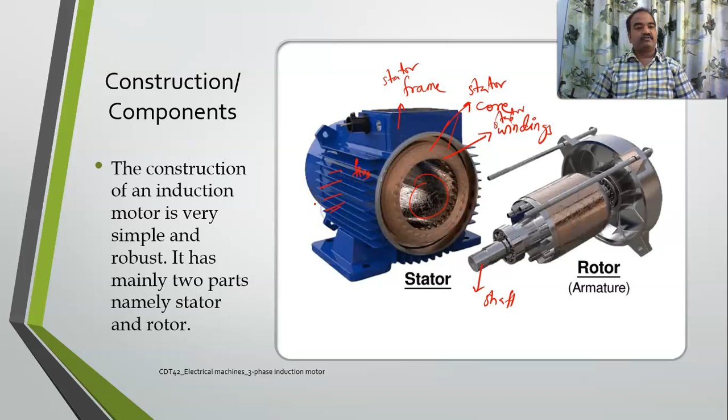I'll show you. These are the fins. These are used for heat dissipation. They provide good air circulation, so that your motor gets cooled. These are called fins.

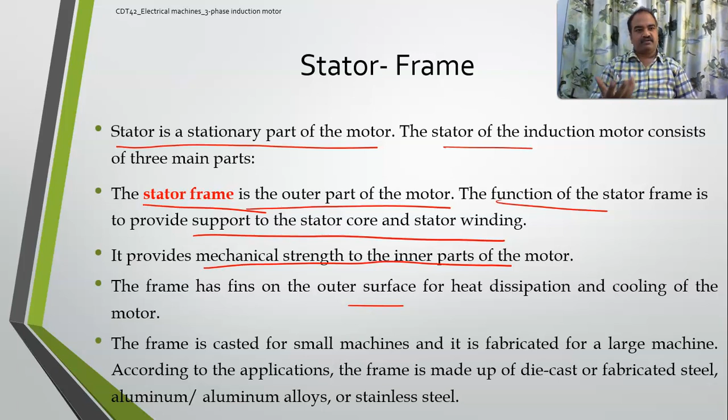For this entire frame, if it is a small machine and you are not looking for larger efficiency, you will use casting, and if it is a very big machine, you will go with fabrication. You will take many pieces and then fabricate the entire frame. Normally it is made of cast iron, and if you want more efficiency, you can go with fabricated steel, or if you want a lightweight one, you can go with aluminum.

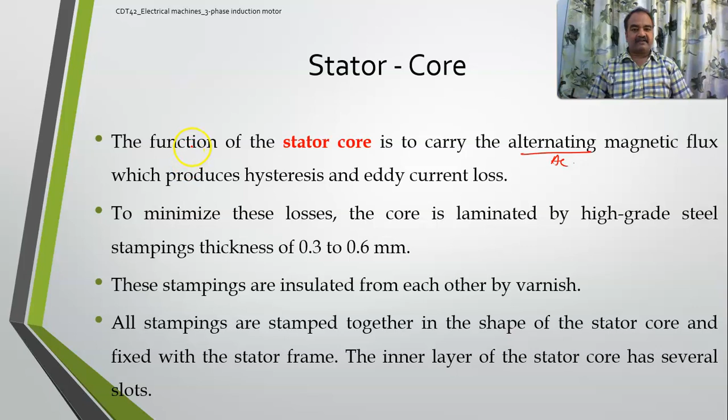Next comes the stator core, which is basically part of your magnetic field development. The core carries the AC magnetic flux. The poles are part of this core, over which your windings will be. Whenever current flows through these windings, you get a magnetic field, and this magnetic field is carried by the core. In this process, it will develop magnetic losses, which we call hysteresis and eddy current losses. To minimize these losses, the entire core will be laminated.

Instead of using one big piece of core, it will be laminated, and between these laminations you provide insulation. Very thin laminations will be there. The thickness will be something like this, and these laminations will be separated because the heat or magnetic loss must not extend to other material. That's why we go for lamination. The separation is done with varnish, which acts as an insulating material.

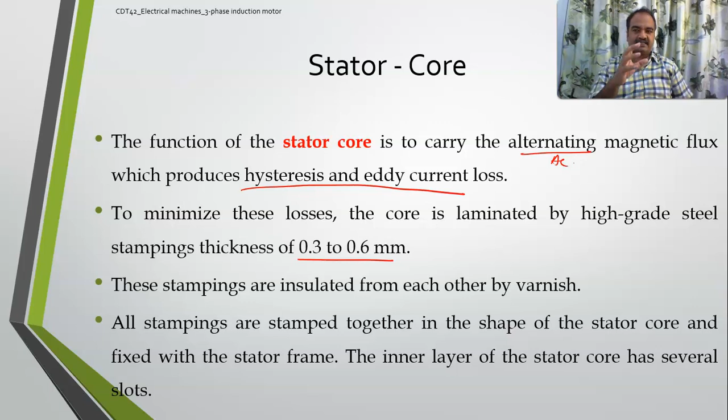All these laminations are stamped together in the form of a core, and it is fixed inside your stator frame. If you look at the inner part, it will have several slots in which your windings will be placed.

Now the stator winding, this is the most important one. It is responsible for carrying current and setting up the magnetic field, which is then carried by your core. The windings are placed inside the stator slots available in the core. Normally you use a three-phase winding. It will be given a three-phase supply, as I have already shown you, 120 degrees apart.

How many poles you use depends upon the internal connection of the stator winding. If you use more poles, you will get a different speed. As I already said, if you use a higher number of poles, the speed will be low. If you use fewer poles, the speed will be high. So this is what I have written: if the number of poles is greater, speed will be less; if the number of poles is lower, you will get a high speed. Normally the number of poles will be an even number. They will be in pairs.

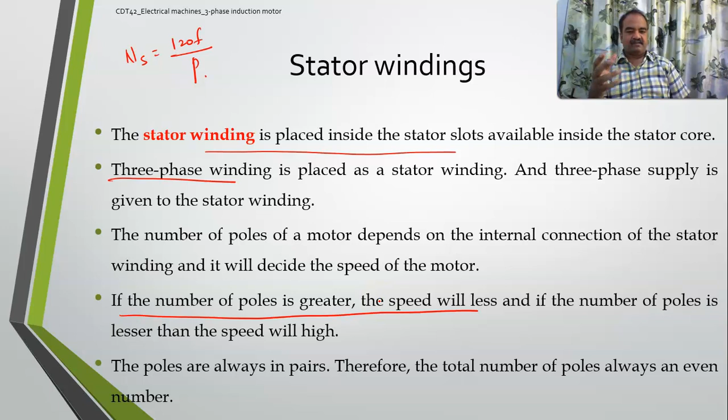The next one is your rotor, which I have shown you as the internal part. In the rotor, you will have conductors. The rotor basically has slots, and in the slots you have conductors, which are nothing but your copper wire.

So you will be winding copper wire in the slots. And the ends of the copper wire, as I already told you, unless you short circuit the conductors, you won't get the machine to rotate. So how you short them: whether it is internally shorted, if you purchase the machine already internally shorted, or you have the wires externally and you need to short them.

If you want to short them, you can directly short them, or you can use some external resistance if you want to vary the speed. So that option is given to you. Or otherwise, internally it will be short circuited by default. So based upon that, rotors are divided into two types. One is a squirrel cage induction motor. The other one is a phase wound induction motor. We call it a slip ring induction motor.

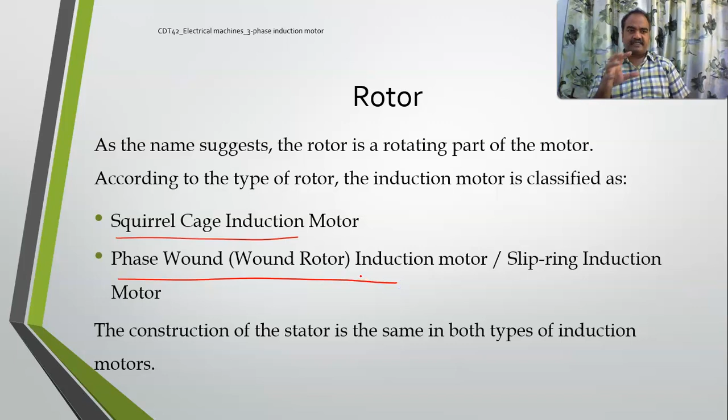Okay. Construction of the stator is the same in both motors. Only the rotor construction will be different. See, the first one, squirrel cage induction motor. It resembles a squirrel cage. It is the most widely used one. Its construction is very simple, and it is a very rugged machine. It can withstand any type of temperatures or load conditions, etc.

So here the rotor internally will be a cylindrical laminated core with slots on it, and in these slots conductors will be kept. Instead of using windings, they directly use rotor bars, which act as thick conductors. These rotor bars are made of aluminum, brass or copper. And these bars are permanently short circuited by default with the help of end rings. All these bars are brought to the end, and there will be end rings.

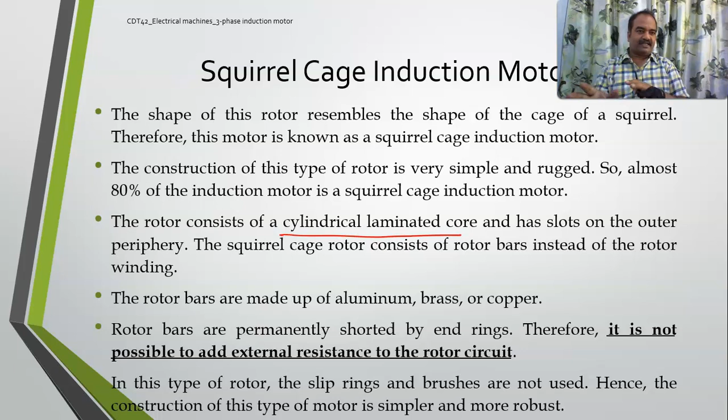So it is already short circuited by default, so you cannot add any external resistance or short it again. By manufacturing itself, it will be internally short circuited. That's why you don't use any external materials for shorting, like brushes, slip rings, external resistances, etc. So that's why this construction is very simple, very robust, very economical, and very safe also.

The other one is a slip ring induction motor, where you have the same laminated core with slots. Instead of rotor bars, you have windings, and these windings are brought out. The rotor winding is wound so that the number of poles on the rotor is the same as the number of poles of the stator winding. This rotor winding is connected as star or delta, but all the end terminals are brought out and connected to the slip rings. Since it is connected to slip rings, it is called a slip ring induction motor.

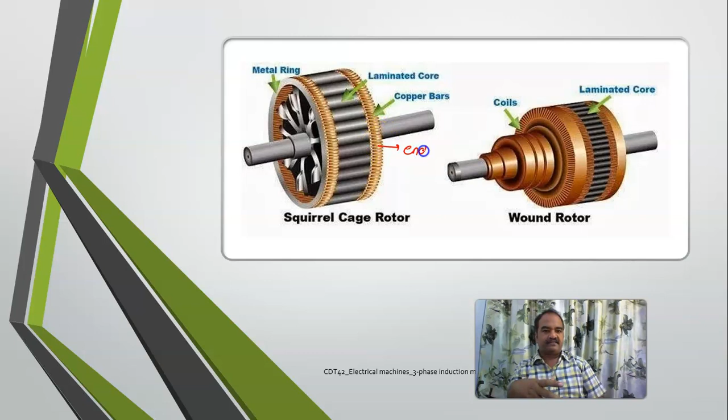In the earlier case, there are no slip rings, so it is directly short circuited with the end rings. You don't need to do anything. But here, slip rings are provided. See, this is the picture of a squirrel cage induction motor. See here. These are copper bars. Directly they are being shorted here. These are your end rings. But this is a wound rotor where all these connectors are brought out to the slip rings.

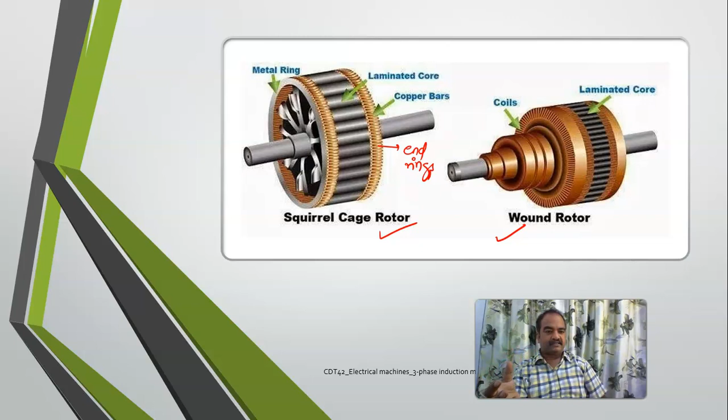Okay. So this is the difference between a squirrel cage motor and a wound rotor. From the stator point of view, both are the same. Only from the rotor point of view: in the squirrel cage rotor, the conductors are already internally short circuited and connected to end rings, whereas in the wound rotor they are connected to slip rings, and you need to short circuit them externally, or you can add a resistance while shorting them.

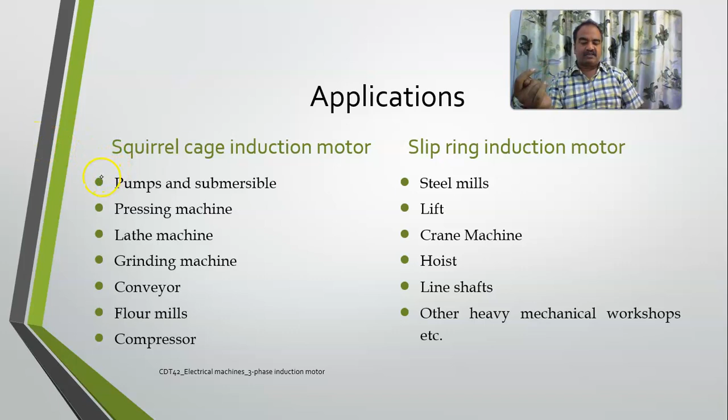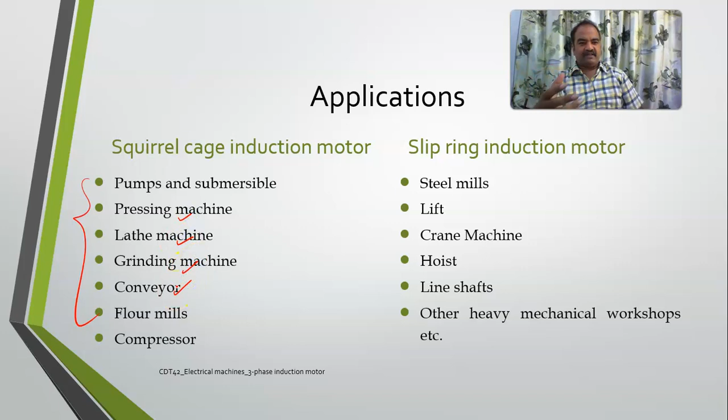Okay. From the applications point of view, squirrel cage induction motors are extensively used in submersible pumps, overhead pumps, pressing machines, lathe machines, grinding machines, conveyors, etc. All very rugged applications. Whereas slip ring induction motors are used where you want to change speeds all the time, like mills, lifts, cranes, where you need to adjust the speed. In these cases, you will use a slip ring induction motor.

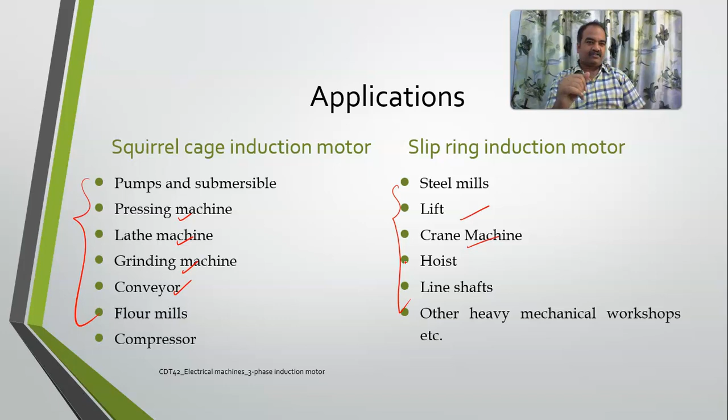Okay, so for heavy lifting, lifts, cranes, hoists, you will use a slip ring induction motor. You can add additional resistance so that you can increase the torque. That's out of your syllabus, but try to remember a few applications of both squirrel cage and slip ring induction motors.

Now we will move on to simple problems on three-phase induction motors. But before that, let me close this one, and I will explain the problems in the next video lecture. A small 3 or 4 minutes, so let me make a separate one. I'm closing.